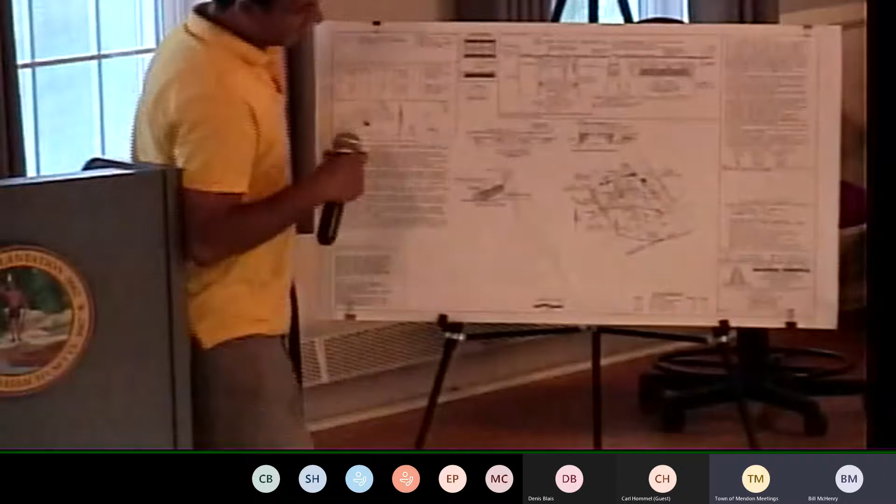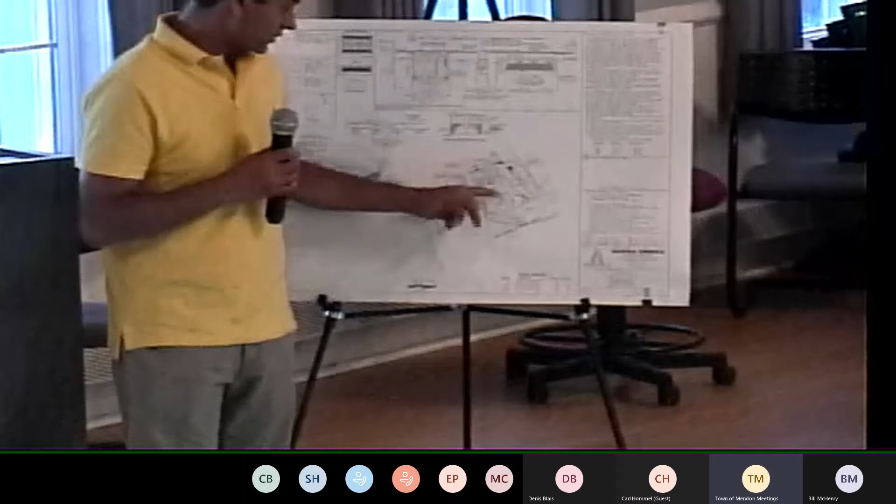So here we have a failed septic system that's about 10 to 12 feet from the wetlands, and it's completely on the water table. It's a very challenging site with a very small parcel. We have wetland in the back of the property, a well that's 38.7 feet away from the proposed septic, and a drainage pipe coming on the side of the property. There's also a walkout basement in the back. So the only option we have is to close out the walkout basement, add some retaining walls, and use one of the innovative technologies for septic, which reduces the system size by 40%. We also have to move the well to meet the setback requirement between the leach field and the well, and we got variances from the Board of Health requested so we can get the system in place. We don't have any other place on the property to do the system, and I think this is the only design we can have.

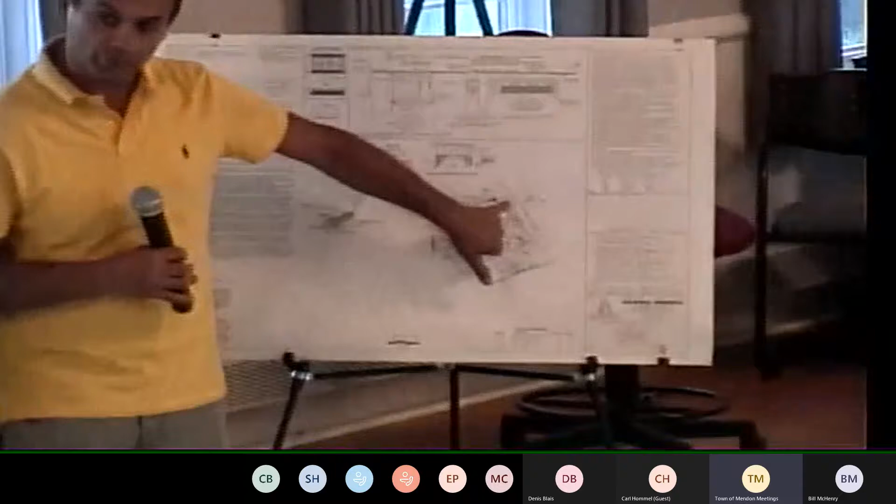Two questions. You mentioned a pipe coming on the side - what is that pipe? Is it street drainage? Street drainage that's feeding the wetland in the back of the property. So it's a clay pipe. Where does that clay pipe outlet? The clay pipe is right here, feeding the wetland near the wetland flag number one. Where's the end of the pipe? Right here, at the beginning of the wetland.

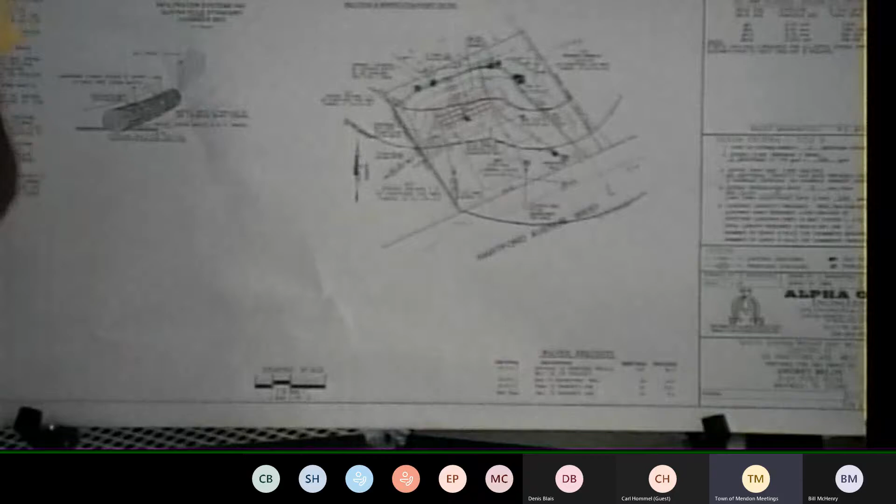The house next door had some junk next to it, right? There's a lot of junk in the backyard. Not your issue, I understand. This is the house before that, to the east. Where is the septic system for that house, and where is its well? It's next to it, in this area right here, closer to our septic. Their well is in the front, away from us. So their well is 100 feet away from the proposed well and septic? It's about 150 or so. That's good. And on the other side, there's no well or septic? Nothing here, nothing on the other side, only our well, which is 38.7 feet, and we had to relocate it closer to the drainage pipe and the street. We're asking for a variance to get it closer to the street to meet the 50-foot setback between the septic and the well.

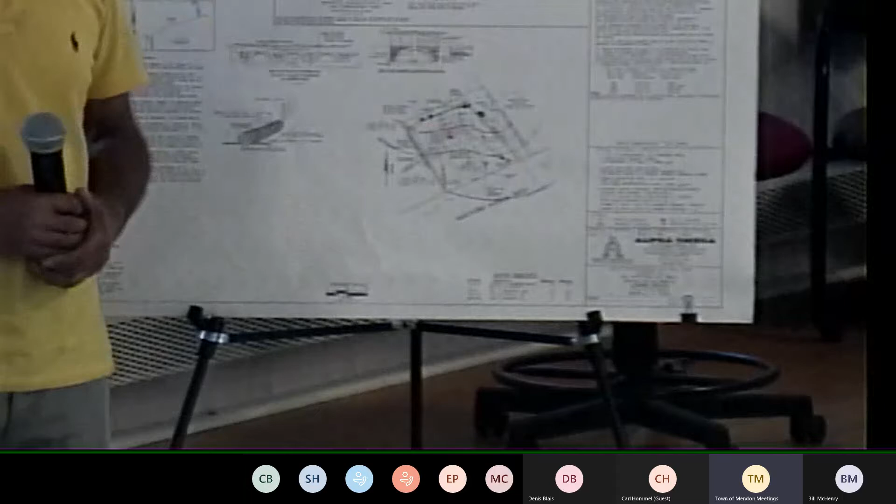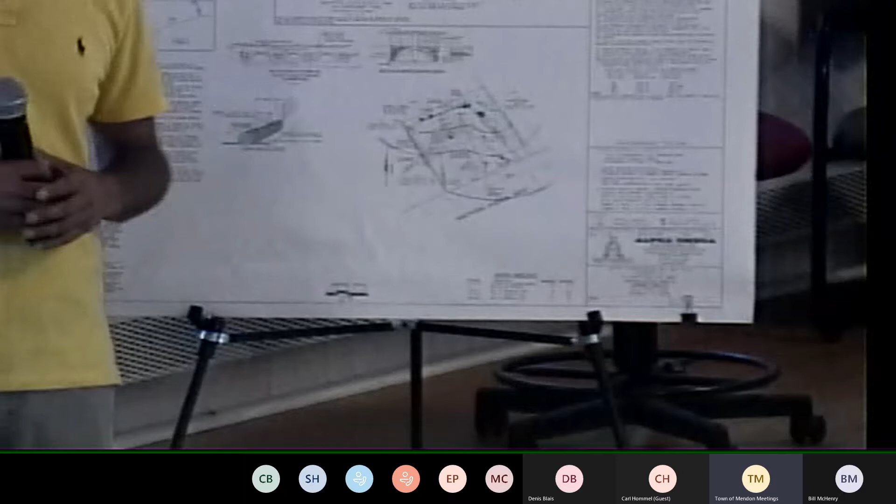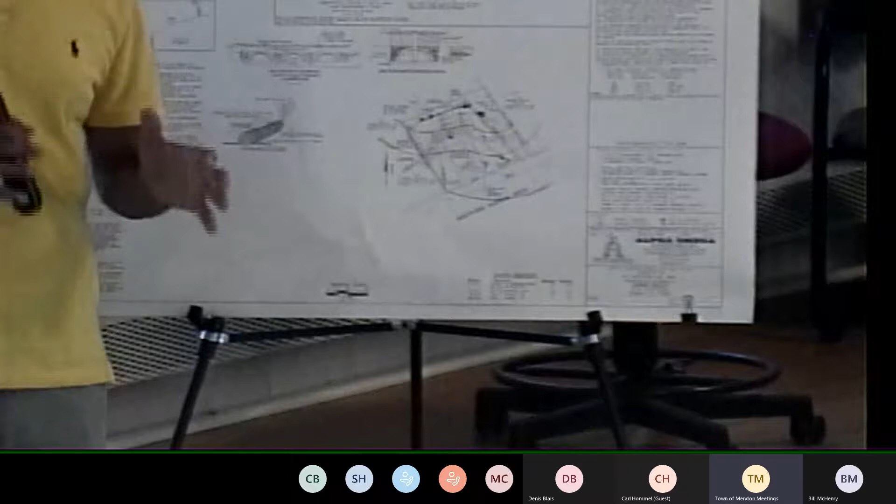Understood. Is it a two-bedroom house, three-bedroom? Yes, it's a two-bedroom, but the minimum size has to be designed for a three-bedroom, even with the new technology. Okay, if there's a minimum size for a septic, is the owner going to max out the bedrooms? No, the Board of Health usually does a deed restriction for a two-bedroom house. It has to be done. Okay, so there's a deed restriction limiting it to a two-bedroom house. Yeah, okay, thank you.

Is that a retaining wall? You gotta put a retaining wall on? Yes, and we're closing the foundation wall in the back, raising the ground, doing 40 mil barriers - we're doing everything we can to meet the requirements. Yeah, because there was a problem there with the existing system going into the wetland at one point. I don't see any details of what you're gonna put in for a retaining wall. It's just gonna be like the Versa-Lok stone walls. I want to see some details. Sure, no problem, make a note that we submit a plan with the details of that wall. No problem.

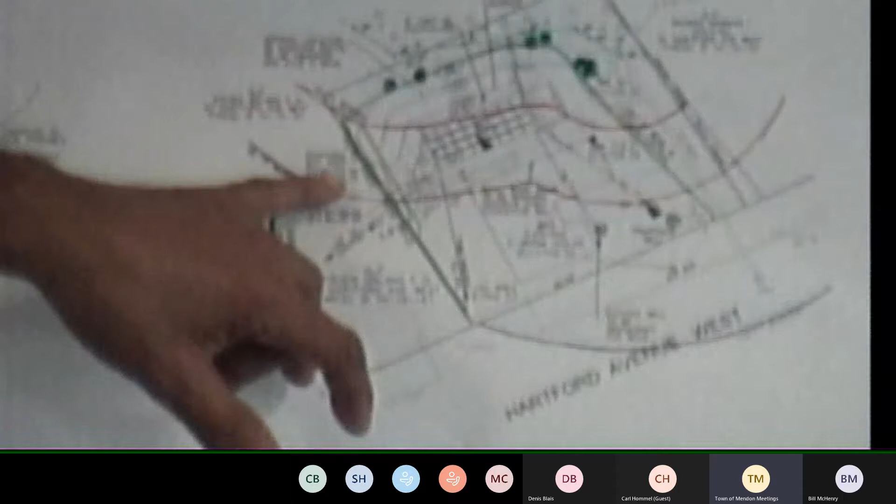Is this an approved plan? If you look at the wall itself, it's not a huge wall, just a couple feet high upstairs. The top of wall is 102, the bottom of wall is 100, so it's not a big wall. I don't care how big or small it is, I want to see a detail on it, and some elevations of what's happening with it. Where you're so close to the wetland, we need to have all that in place. No problem, sure, that's easy.

I see the soil logs, no perc test? The perc test was done by a different company, actually. There's a deep hole where we have it in the middle of the system, and there's another one in the back next to the well. They tested different areas to see different options. So the results of the perc test were?

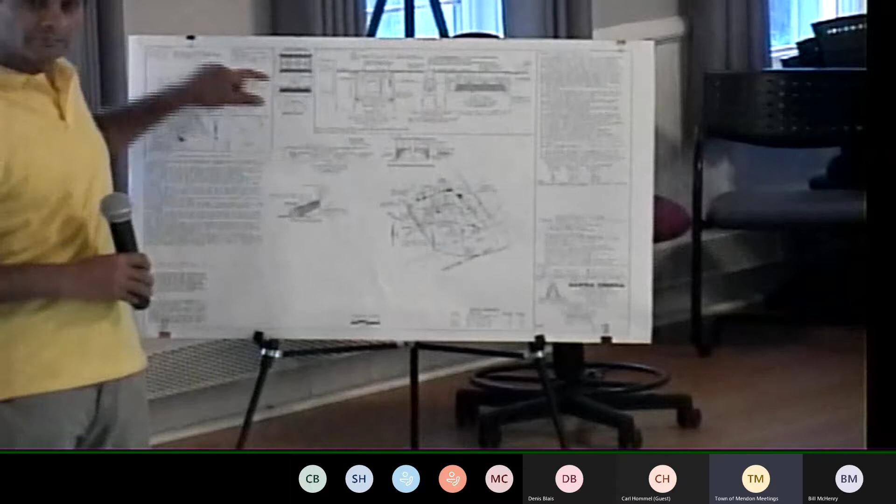That says the soil was too wet to perc and was sent to the lab. They did a sieve analysis - that's the other company that did the perc test. They sent it to the lab because it was so saturated. So they did a sieve test, and that comes up with X amount minutes per inch, and that's the design for the septic. So the design rate is 10 minutes per inch. Yes, pretty standard.

Okay, thank you. So this is the approved septic plan? No, this is a proposed plan. This isn't approved by the Board of Health yet? Not yet, no, but we had a preliminary meeting with them, and they said they were willing to give us any variances we can to get the septic in place.

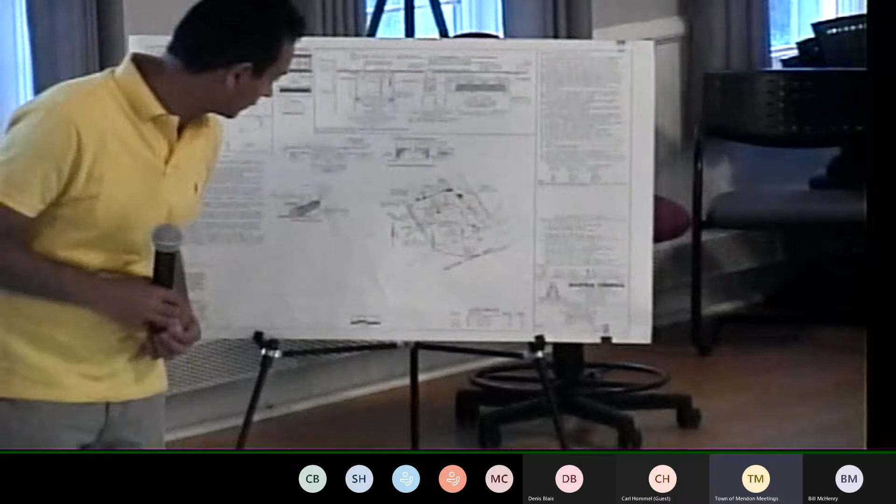So the way it is now, is there going to be any filling of the wetland or is it just work in the buffer? We're just working the buffer. And how close is the closest point of work to the wetland? The grading will be about 5 feet to the wetland, near flag, between flag 5 and 4. This is the nearest point. The drain I'm not as concerned about, but the septic system, how far is that? 21 feet. Existing system is much closer, and it's also in the ground. Understood, there's some elevation, right?

You'd like to know what type they're doing over there. Hopefully they got this - no, this is the house. And how would that be finished out? It's going to be grass all the way into the wetland, because I'm not sure what's there now. I imagine there's some shrubs in the wetlands, or grass? There's the whole area - we're not cutting any trees, we're not touching anything, it's just all grass, and it's going to remain grass.

You're telling me there's no shrubs growing up along the wetland edge? It's grass right to the wetland? There is some - there are a few trees around, and then just some small shrubs. Those few trees and the small shrubs, are they getting touched? No, they're staying, we're not touching that.

So you're putting erosion control at 10 feet away, 20 feet away, 15 feet away? The erosion controls are all the way around the property because the whole property is in a 100-foot buffer, and all the way at the edge of the grading, at the bottom of the proposed slope. So we're not going beyond that.

Whatever materials they bring will be done on the same place - there is no place to store any materials on site. Whatever will be taken out will be removed the same day.

I guess where I'm going with my questions is, we're going to end up with a buffer, right, and we're going to end up with a lawn in the buffer. I would rather not have lawn all the way up to whatever is left there naturally that you're not going to disturb - I would want to see some sort of plantings. It's a fine line whether we can require it, since it's buffer, it's habitat, but the problem is we cannot plant any trees or shrubs within a certain distance of the leach field because the roots will go into the system, so we have to leave at least 10 feet.

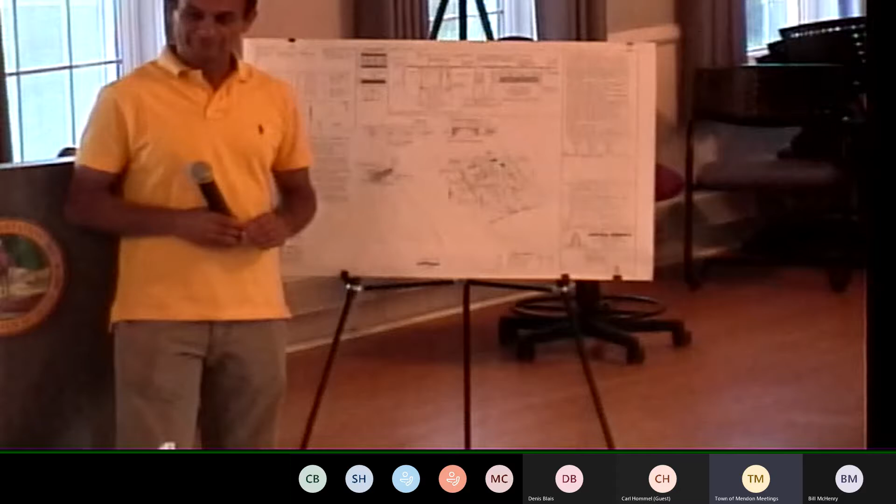In the buffer zone, you could put a wood pile in the buffer zone, right? You just can't put it in the wetland, right? I don't know, it's a judgment call, because now we're making a buffer. If he had to cut down a tree to make the buffer, it's an existing setup. So I'm just kind of throwing it out there.

To be honest with you, I would support this. We need housing, it's a tight site, an awkward site. So I'm looking for something on the other side to give a little more than you might have to, because that's the selling point.

Homeowner wants to do whatever, so whatever is there is going to kind of... if the commission wants to put some shrubs on the slope, like have it in the order of conditions, that's fine. I think my client will be okay with some sort of planting besides grass, so he's not tempted to mow it. I don't know, creeping juniper or some sort of ground cover. I'm sure my client will be open for that, that's fine.

Well, ask him. Yeah, thank you. I mean, at this point you're bettering the situation, and I understand that, but we need some detail on the plan for the wall -- what you're going to use -- so when we go out there for an inspection, if the person doing the job doesn't realize what we talked about...

He puts just a few boulders he found in the backyard versus something with fabric and a Versa-Lok wall -- it's two different things. Even a few boulders would be okay because it's only a couple feet high, but that's fine, we'll give on that. Just put something there so we know what you're using, since you're so close.

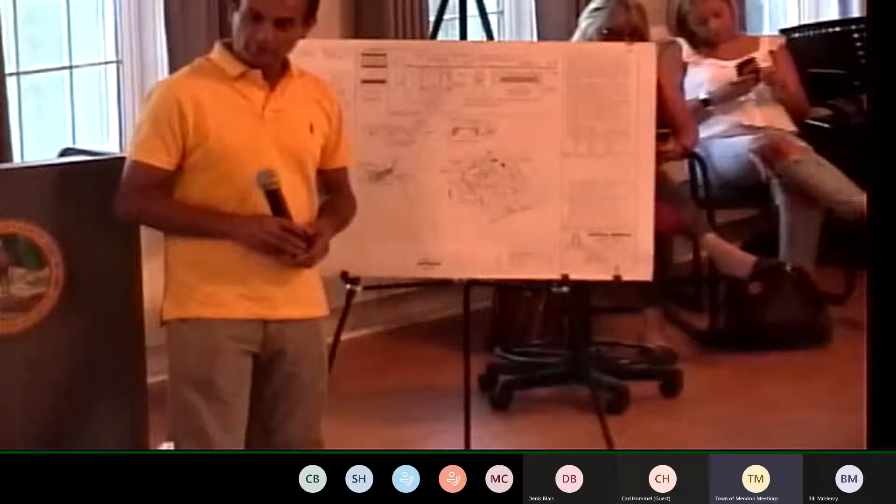So everything will go sheet flow back toward the north, to the back. So you're assuring him it's not going to come down along the road edge? No, it's going to go directly to the back. Yes.

I don't know, but according to the lines you've got here, it doesn't look like it. It looks like you're getting everything funneled in right here, which is going to come to this back corner.

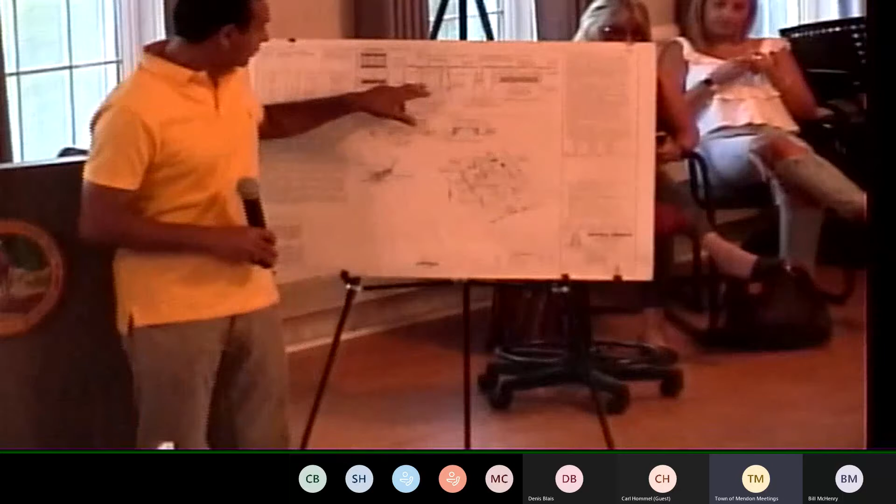If you look at the system profile, you're going to see at the house it will be 103.5. Yeah, we saw that, at the tank it's 103.35, and at the system 102.5, going away from the house toward the back wetland.

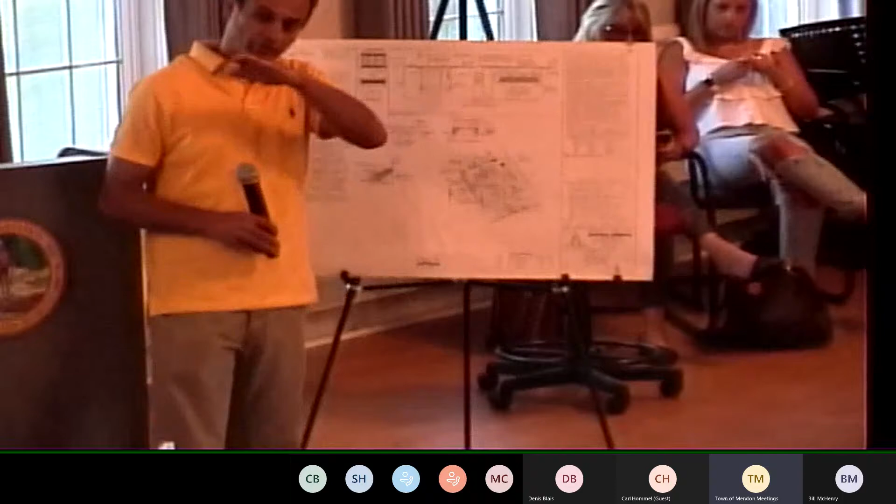If you look at the overall grading, if you're standing at the road looking at the house, the east to west grade - is it perfectly flat? It's almost flat, and there's a house in between, so you have two different drainage areas.

The drainage on the right-hand side is never going to go to the left-hand side, and vice versa, because there's a hump in the middle - because there's a house in the middle, so that elevation is higher.

So the drainage on the right-hand side, on the east side, will keep going to the north, and on the west side will also go to the north. So it's not going to cross from one side to another.

Got a 1.5 slope pitch from here, because the house is at 105, so at 104 it's not going to go, can't go around that way. So the only way for a little bit of this water to get out is this way.

Where's this water going to go? Well, that's right to the wetland. That's where it goes. That's the street drainage, that's our town pipe, evidently.

Topo - maybe you can see something on this side? You know what I mean, maybe a few ground shots up front to assure him that the water's going to go down that way? Sure, no problem, that's what he's asking for - more topo.

The east side, we're not touching anything. We're not changing any grading on the east side. No, I mean, I want to see the topo all around this - you only gave us a little snapshot of the property.

There is a... I mean, this is the whole 90 by 100 square property. That's it, that's the whole land. We don't know what's on the other side, we don't know. That's the whole topo over here. Okay, so we need to see the topo.

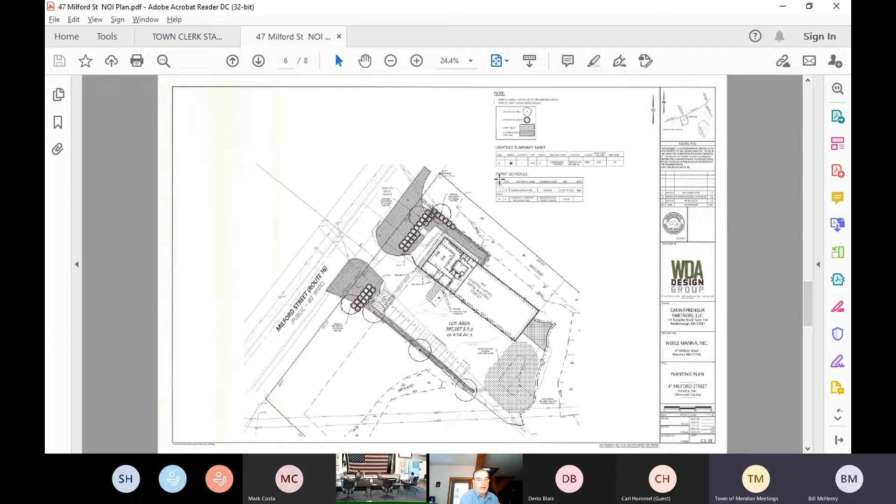So you can see the existing site, the existing building. We're not expanding on the existing building. The first 2,500 square feet of the interior there is to be remodeled and used for the marijuana dispensary, and then the remaining 4,950 square feet will be proposed storage or possibly future manufacturing. So the existing building footprint is to stay exactly the same.

There's a little reworking of some of the pavement to the west of the building, on the left-hand side - it's already paved, it'd just be cleaned up, and then there'll be a concrete walkway to access the rear of the building. There's also a proposed security fence around that backside and along the side of the building to close it off for security purposes.

The parking striping that you see just to the south of the building, that's just restriping of the existing pavement. We're not expanding that pavement, so that footprint stays the same.

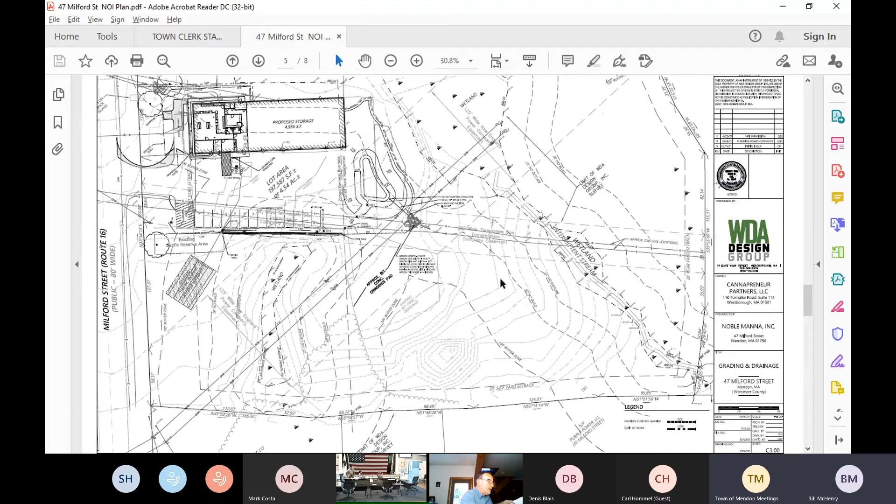I know there was a question in the earlier meeting about the retaining wall. We have a detail for that on the detail sheet, which is sheet C401, the last sheet in the set.

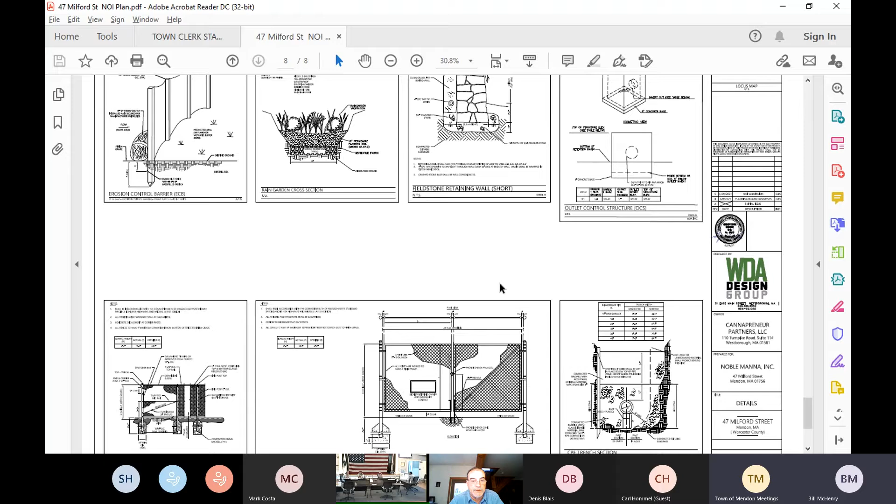So it's a field stone retaining wall, labeled short, under 4 feet in height. It's not a structural engineered wall. It's placed stones with a batter on the wall, crushed stone footing, and it also has a drain and stone and filter fabric behind it.

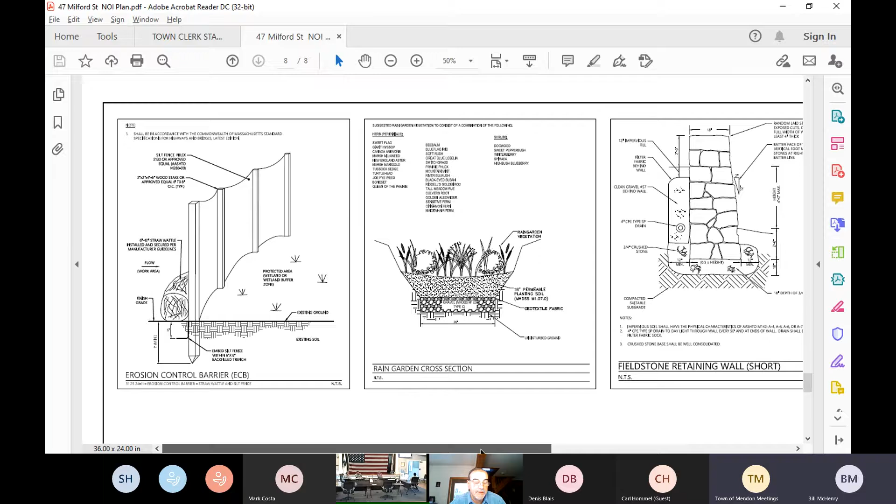The detail just to the left of the retaining wall is the rain garden cross section. This outlines the 18 inches of permeable soil mixture described, which is typically 60% sandier soil so that it drains, underlined by a 9-inch thick layer of crushed stone.

We had our soil evaluator do a test pit in the middle of the rain garden, which was where pavement used to be. He found buried tires and fill to 46 inches. Then from 46 to 68 inches was a layer of nice clean sand. And then from 68 inches to 116 inches were the parent materials, which were a loamy sand.

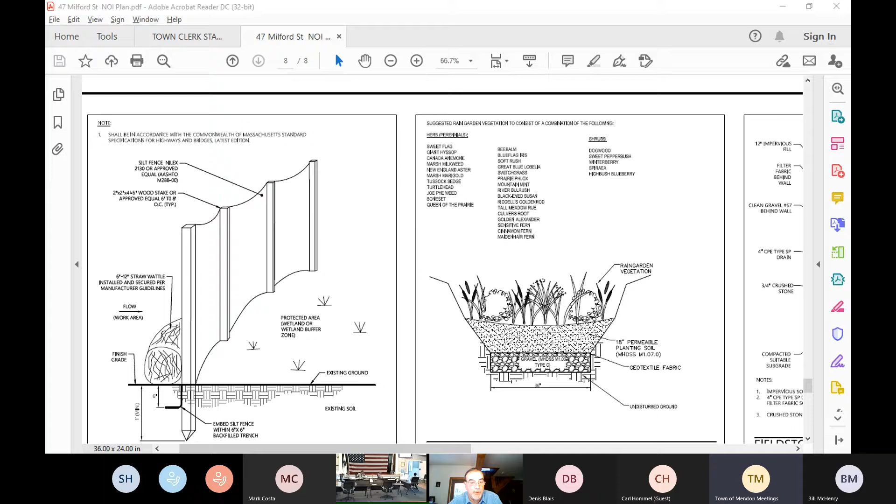So as part of the construction of the rain garden, the existing contour elevation there is 324. The finished grade would be 321. So we'd be cutting down, taking out that 3 feet of pavement and fill and stone and tires. And then once that's out, you'd be removing the other 27 inches to place the good soil and stone for the rain garden. Once you do that, that gets you back down to the sand and the parent material.

So the rain garden will be constructed once all that fill and pavement is out of the way. The rain garden would be constructed over the parent material, the good parent material which underlies the fill. So there's no work within a resource area.

We are partially within, obviously, the 25 and 50-foot buffers, which, you know, the site was developed well prior to the regulation, so some of that is just a byproduct. But again, we're not expanding roof area. We're removing impervious area and adding stormwater attenuation and infiltration for a site that doesn't currently have any.

There'll be an erosion control barrier around the entire work zone, which consists of a staked and entrenched silt fence with a supporting 6 to 12-inch straw wattle. I think that about covers the project. I'll turn it over to you for any questions.

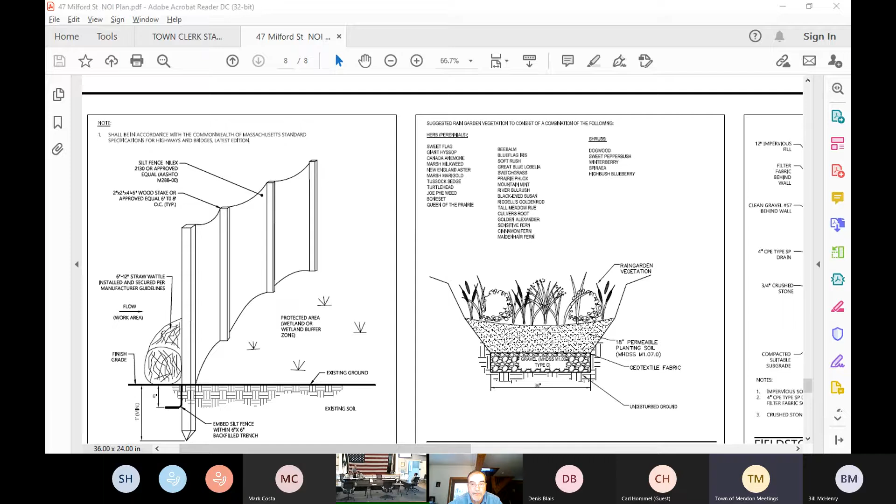Just a general statement, I'm a strong proponent of rain gardens, so I'm loving to hear that. But to me, this doesn't really, I wouldn't call it a rain garden, I would call it a planted retention pond. You have to, I am assuming, obliged to improve stormwater to the best of your abilities, even though it's existing. I imagine I would hope that you've got to do something. So you're doing the good thing, right?

So then the only question is what water is going to get into that detention pond - the grade, the runoff from Route 16 onto the driveway, the rain on the roof into the gutter. You tell me, I'm sure you've done the engineering to say how much gallons or what the flow is going to be, and that's what generates the size of your detention pond.

Well, can you - it's actually not a detention pond, it's not detaining water, it's planted with all those species. Well excuse me, educate - there's detention or retention, right? And aren't you obliged to build retention so that the rate of water coming off... I don't know, but detention isn't known for getting the water into the ground. Because you have good soils, you're doing the good thing by recharging.

I'm supportive of it. That's okay, we'll call it whatever you want. Because really what I'd like to see is a rain garden elsewhere that minimizes the water, if you have good soils to get, but I don't know, you don't have a big site, but yes.

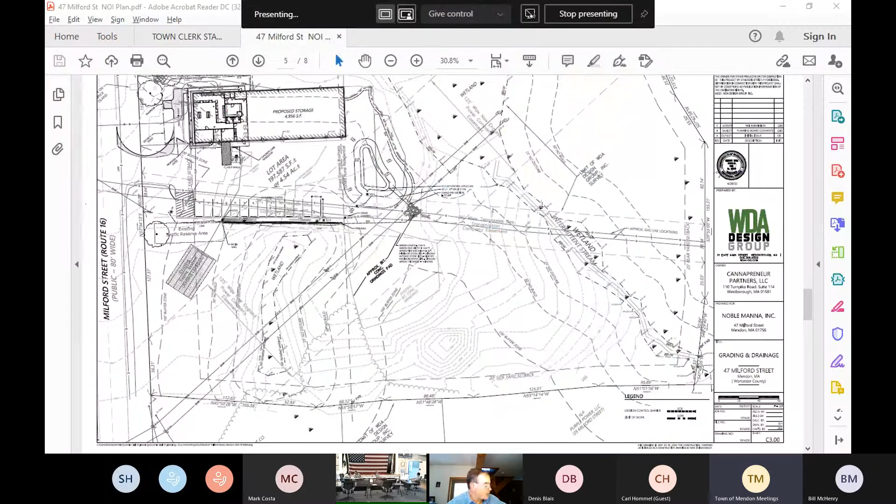There is a small area of Route 16. Where the driveway goes up, it slopes from elevation 330 to 328, so a small portion of that comes in, but it goes across the curb at the driveway entrance. If you move your cursor down to where the driveway entrance is, there are two contours there. That already sheet flows across that driveway entrance down towards the vegetated area and towards that wetland finger. So that drainage divide is not changed - that's staying the same. That part goes where it always has.

And what we're picking up is the portion of the paved driveway or paved parking that typically sheet flows off towards that isolated wetland. Now that will be directed to the grass swale off the edge of the parking. That's why he starts the wall and the water quality swale where he has it - that's where the drainage divide is, the small area that comes off Route 16 sheet flows across the southerly edge of the driveway towards the septic system, if you will.

And then the rest of the parking lot sheet flows to the southeast towards that isolated wetland, or the small area where the rain garden is, that just sheet flows down into the easement and towards that southerly wetland. So to answer your question, the small area that comes in off Route 16 goes across the driveway as it does now. Everything else that's historically been untreated will now be directed through the parking spaces - those are just curb stops - sheet flow into the water quality swale, directed and pitched down into the rain garden. So we're only putting that portion of the parking lot into the rain garden.

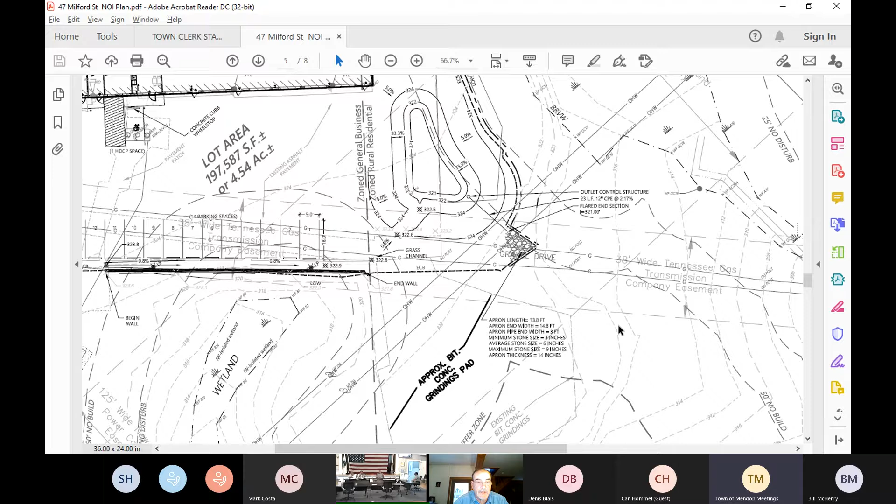No, it's labeled as a grass channel. It's just going to be a depression in the ground. It has about a 1% slope. So what's the detail? I see a detail for a CPE trench section. Let me go to that. That might be for something else.

Grass swale, how wide and how deep? It doesn't really show up on the topo, it's so narrow. Existing pavement... Oh, that CPE trench section, that's for the outlet pipe from the outlet control structure. Okay, that's not for this trench.

The trench, the grass swale between the edge of the parking and the retaining wall, is about 4 feet wide. You're going to have a trench that's 4 feet wide, and how deep? You're not showing a detail on it. I guess my concern is, what's the slope on that? Is it a flat, shallow trench with relatively shallow grades?

Yes, to get to 4 feet, it's probably only about 8 inches deep. It's more like a parabola, and it's pitched at almost 1%. So it just picks up that water and directs it down towards the rain garden. Very shallow, yes. Well, I'd like to see some kind of detail on it.

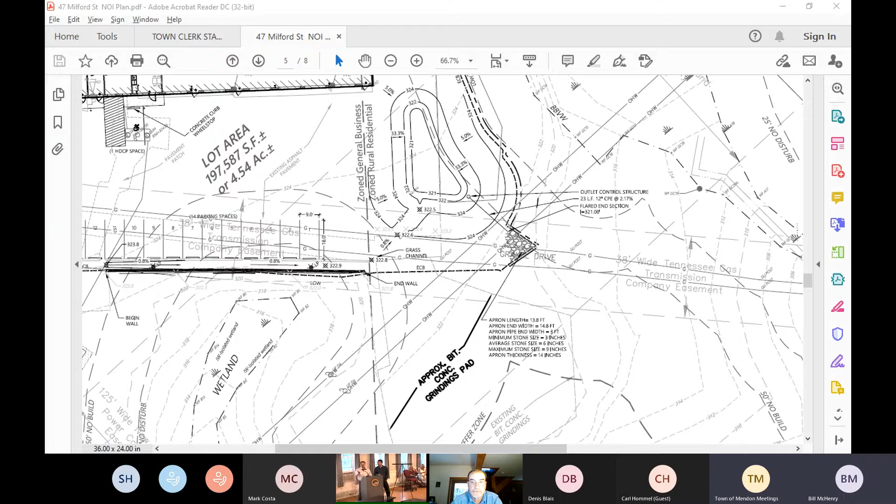Are you opposed to somebody coming on site, maybe meeting with you, and you could explain it to them? We're happy to meet with anyone, anytime, that way if he has any questions, you can actually see it and maybe make things a little bit easier. If you want to submit requirements for those two things for us, we're happy to respond to those and build them to suit. We just want to get this project going as fast as possible.

I hear you, and I think it'll be settled at our next hearing. I don't think we should make them wait 4 weeks. I think we should either come up with a way to do it on an interim basis or schedule another meeting in 2 weeks for this and any other actions that come up.

COVID on top of a lot of other delays, which I won't get into details, this project has been significantly delayed. So my question to the town is, what's the significance of this? Is it huge? Because we would love to see an approval pending that. We're happy to be completely transparent with the town. I don't want to get into all the negatives about why this has been delayed, but there's been a lot of crazy delays. All right, so our next meeting is July 15th. We'll get you on there, get you done, get you over with.

Just send an email—have your design engineer send an email showing what that swale is going to look like. That's a significant situation, even though it doesn't look big on the plan. I'm just trying to understand its significance, because if it's not designed right, all this water could end up going where you don't want it to go.

He wants to see it—that's what he does for a living, and he knows what he's talking about. So if he wants to see something to make sure everything's done the right way, I think that's reasonable.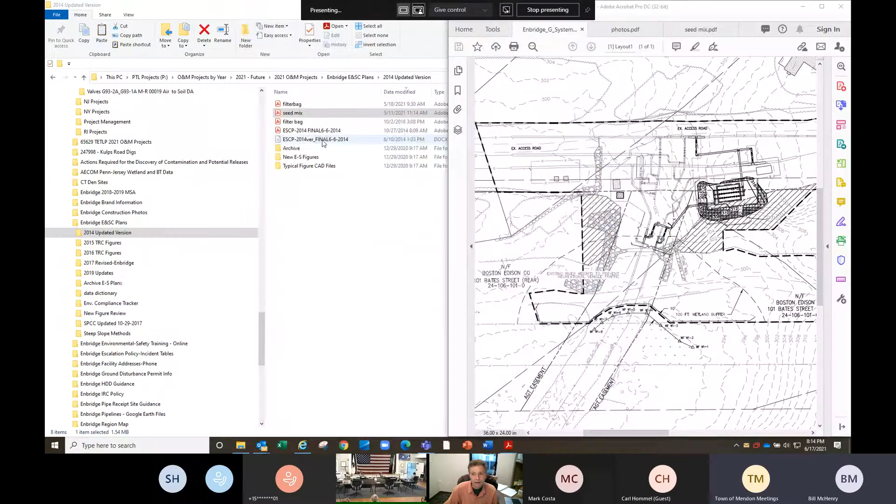This particular project, should I share my screen to look at this plan? If you can quickly, yes, that's probably easier. Bob, you're already done, go ahead, and at least you can use your cursor. There you go, you're all set. You see that? Uh-huh.

So this is Algonquin Gas Transmission, right off of Thayer Road here. This entire area is a large fenced-in valve site, and there's 4 main pipelines: the Algonquin Gas 24-inch main line, and the 30-inch loop line that parallels all the way through here. Coming off of these is the G system: the 20-inch G1L, which is the loop, and the original G1 pipeline, the 16-inch. Both of these come off these two particular pipelines. This project, the G system here, provides natural gas for pretty much all of southeastern Massachusetts out into Cape Cod as well.

Right now, gas flow through these larger diameter pipelines is not regulated to enter the G system. There's no regulation there. So the intent for this project is to install a new pressure regulator and associated piping in underground facilities, so that when they transfer gas from these large diameter pipelines into the smaller diameter pipelines, it can be regulated and down-pressured to the operating pressure for the smaller line. Right now, without the regulation capability at the site, the only way to handle that is to manipulate gas pressures on the main line and the loop, which originates out of the Burrillville compressor station in northern Rhode Island, which is pretty far away. And the result of that affects gas flow in general across the entire system in New England, and especially on the G system.

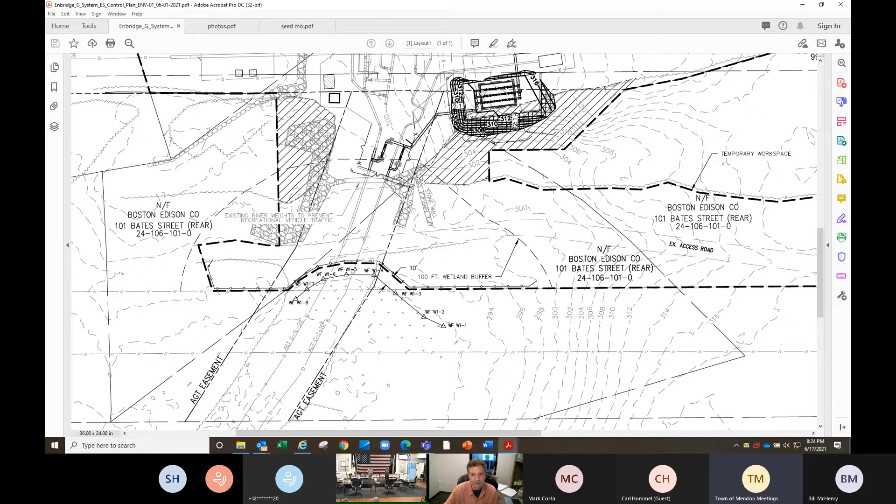And then there's also some more proposed up around here. This square here is basically where the primary regulation piping is going to be, and a new building. Gotcha. And this will all be fenced in and connected to the existing fence line of this entire area. And I do have some. You know the excavation of the water table there, where you're going to be excavating?

Do we know the depth of the water table? Just so you know, we did some investigative digs on our right-of-way there and we did not encounter water down to our pipeline. So the southernmost areas would probably have the highest water table.

Did you dig a test pit to verify that? No. When did you dig it, what time of the year? Springtime, it was this year, March. I think it was March.

Yeah, this whole area is generally fairly high and dry, except for the wetland. It's elevated in itself. It's the wetland shown on the plan that's the only one nearby. There's nothing else in the vicinity of the work.

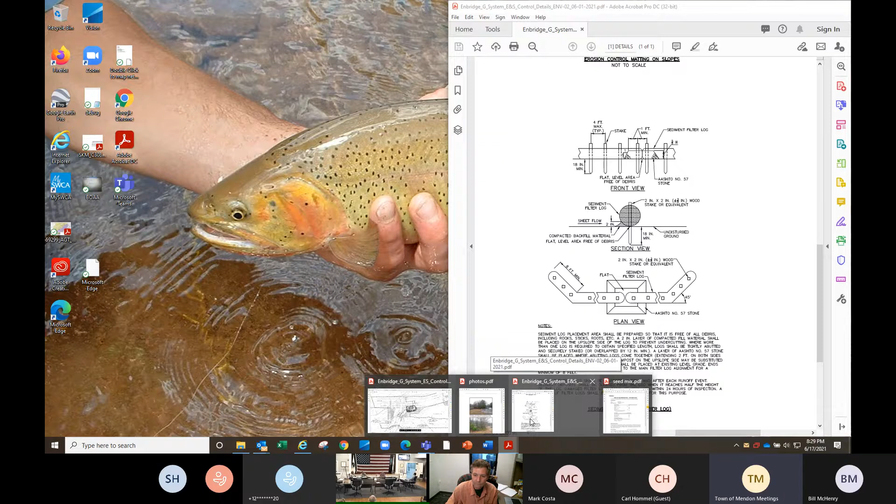I see it in your details, and that's why I asked the question, because this is a boilerplate detail book, and I just wanted to hear it from you, so that we have it in the minutes that you will have the necessary dewatering equipment on hand.

This is Scott speaking again - I can tell you we're still negotiating with our contractor, but those are definite line items that are already in our agreement. The pumps, hoses, filter bags, along with straw bales, will be readily available on site.

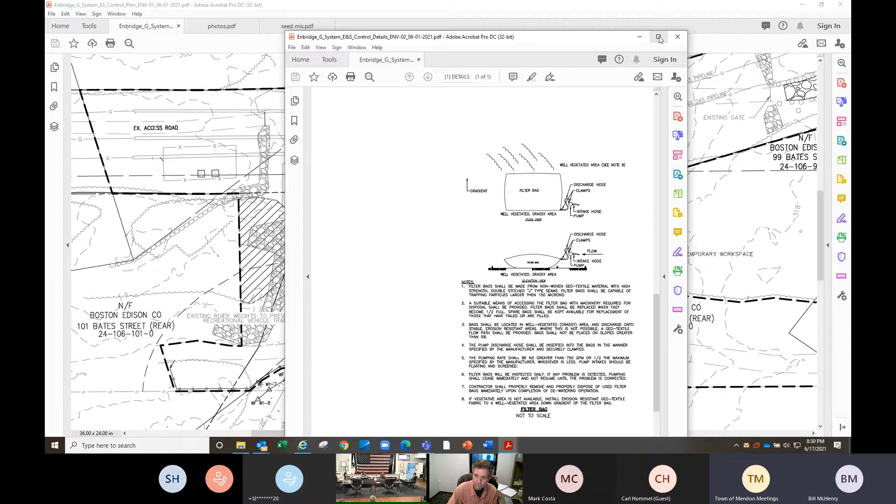So when I come out, or Peter goes out, when you guys start, let us know that you're going to start the excavation, and one of us will go out there and say, I'd like to see the dewatering stuff that you have on hand. You'll be able to pull me over to an area where it's all stored, ready to go? Yes, yes, we will.

All right, any other questions? I'll make a motion to approve subject to getting that detailed trench cut. You still want it? Yeah, I want to know where the pipe is, but let's get a cut sheet. I'm not gonna give anybody permission to just go out and start digging. The pipe's there. Yeah, we know the pipe's there, but when are you looking to start this project?

I think it was end of this month. Is that right, Scott? No, it's mid-July, towards the end of July. So if you get us that detail sheet that Mike wants, we'll approve it at the next meeting. That shouldn't be a problem for us. The information we got back in March is in our design firm's hands, so it should be easy.

All right, so July 15th, want to make a motion to continue this to July 15th? I'll make a motion to continue this until July 15th. I'll second. Emilio, second. Bill, all in favor? Aye. Mike, aye. Peter, aye. Carl Hommel, yes. Emilio, aye.

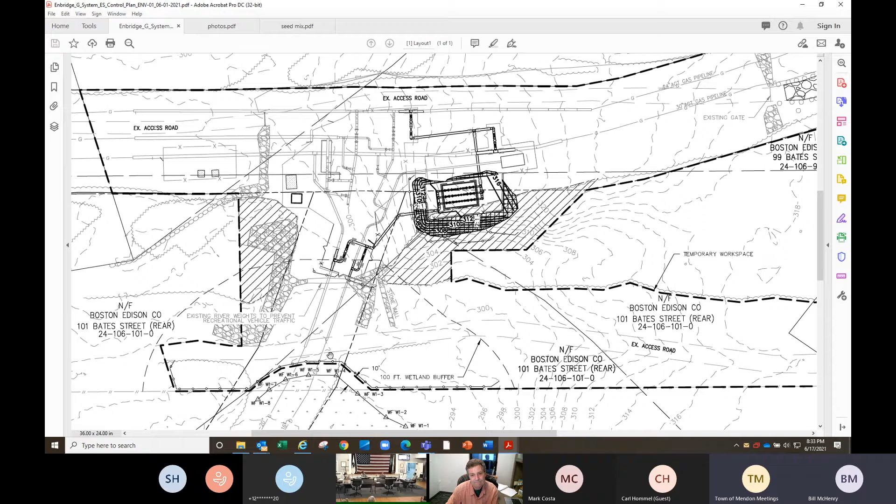Going to be digging. And if there's going to be an emergency dewatering situation, where would you be dewatering to? Are you going to build a temporary detention basin that you pump into so it doesn't send silt into the wetland? Those two items, I think, would keep everybody happy here and move your job along quickly.

Yeah, I mean, I don't know if we can predict where we would hit water, seeing as we didn't really hit any back in March when the snow was just melted in very wet conditions. But in the event that they do, we'd use a filter bag or a straw bale corral and put the filter bag inside, placed in a well-vegetated upland location, probably up on the right-of-way somewhere. In a vegetated area in the right of way.

If they hit water here for some reason, or if they hit it here, they could probably run some hoses up into an upland vegetated area. That's usually how we do that, a well-vegetated upland area. Give us some sort of outline so it shows that you'll be prepared for the worst case scenario. I'm sure you're going to be prepared for the worst case scenario when you clean around that pipe and make the cut.

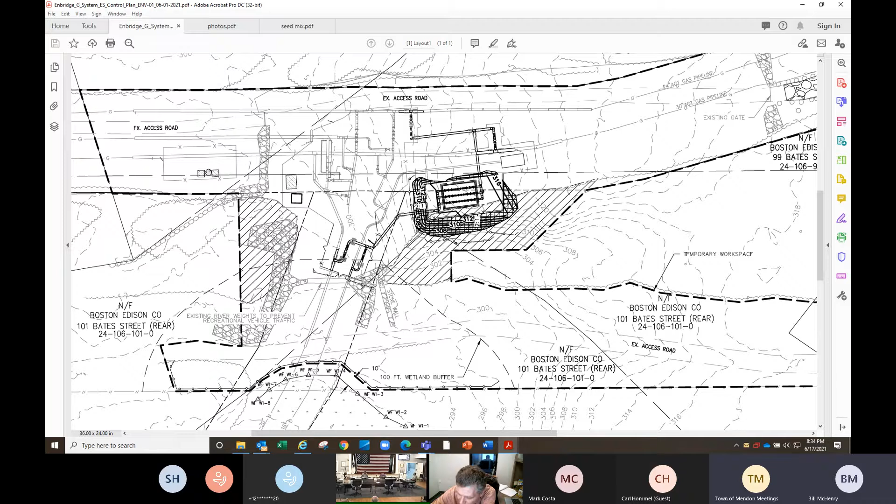You know what I mean? You're going to have that well thought out. Again, if some water comes, we don't want the contractor wondering what he's going to do and just pump it right out, et cetera, et cetera. That's all.

Thank you. You're quite welcome. So continue to the next meeting, and we need to provide you with these details we just discussed, by July 15th. Then just submit this material to Bill. You can submit that to him as soon as possible, and then we should be able to get this done fairly quickly at the next meeting. Thank you very much. Thank you.

All right, discuss the fish kill at Lake Nipmuc with residents. Do we have residents here? Oh, we got some. Want to talk about that? We got them all.

So what do we got? I do know there were some dead fish down in the cove. ESS told the other people doing the report, and they sent us a report that it was spawning damage. They said it wasn't a lack of dissolved oxygen, which is usually the cause of big fish kills, but that when fish spawn this time of year, they make their nests and get abrasions, which let bacteria in. So there's a scientific term for it, spawning kills, where several fish die and then float. That was their best guess as to what caused the kill.